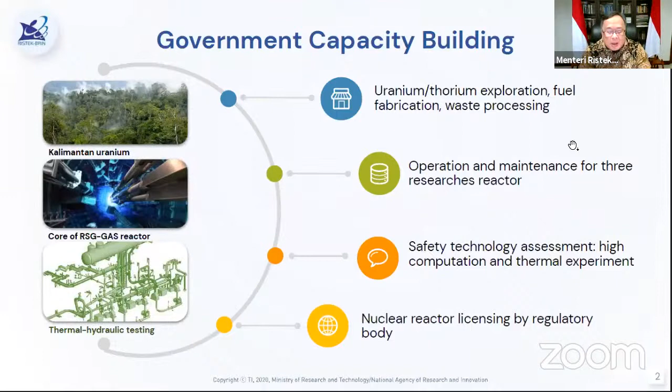Moreover, the specific capacity building for human resources on research and engineering has established a conceptual design of small nuclear power plant, supported by IAEA and collaborated with some national state and private engineering companies. The design improves Indonesia's human resource hard skill through high computation of nuclear reactor and thermal hydraulic experiments, which simulates the accidents happening in our laboratories.

Indonesia, in a similar scheme of human capacity building, also considers the operation and maintenance of 3 research reactors for decades. Therefore, Indonesia has also established a national regulation and regulator, namely Indonesia Nuclear Energy Surveillance Agency, or BAPETEN, for implementation and license of nuclear power plant at land-based condition.

The national industry on the application of nuclear technology provides some radioisotopes produced by our nuclear facilities, including research reactors. Those productions are fulfilling the national market demand that's increasing year by year. The medical purpose gives the hospital capability to help people, especially for those undergoing cancer treatments. In other aspects, mineral mining also utilizes some techniques for logging and process sensing of chemical plants by using radioisotopes such as cobalt-60.

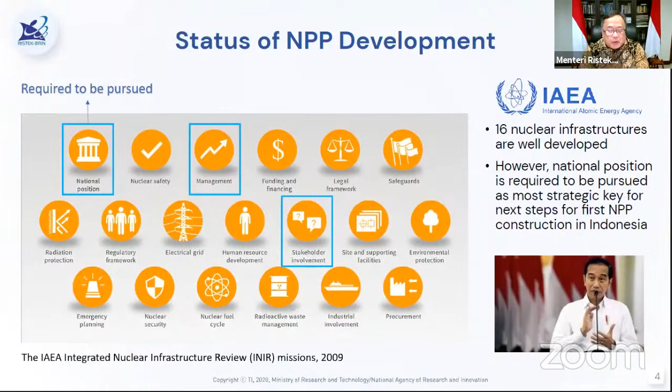To pursue those national positions, the consideration involves some assessments that include multi-criteria of the nuclear power plant's importance, national and international cooperation, regulation development, and continuity of the program between national stakeholders. All assessments are mostly done by following the presidential decree, which states that nuclear power plant must consider multi-criteria, assess the technical safety, and last option energy that could be interpreted since the demand could not be fulfilled by all other new and renewable energy resources.

Furthermore, the assessment will be a decision basis for national political support with the aim of the go nuclear option. In parallel, the national stakeholder prepares a roadmap for nuclear power plant implementation, which is led by the Ministry of Energy and Natural Resources, Technology and Site Selection, which is coordinated by the National Nuclear Energy Agency of Indonesia, or Batan, as well as licensing, which is conducted by Indonesia's nuclear regulatory body, Bapeten.

In our national context, our speakers are beneficial for us to have a clear understanding on how our nation prepares to have our first nuclear power plant. I really appreciate how Batan, in collaboration with other agencies, prepares our national capacity from site selection, nuclear fuel, nuclear reactor operation and safety, also nuclear waste technology, and all the required infrastructure in the frame of the National Nuclear Energy Program.

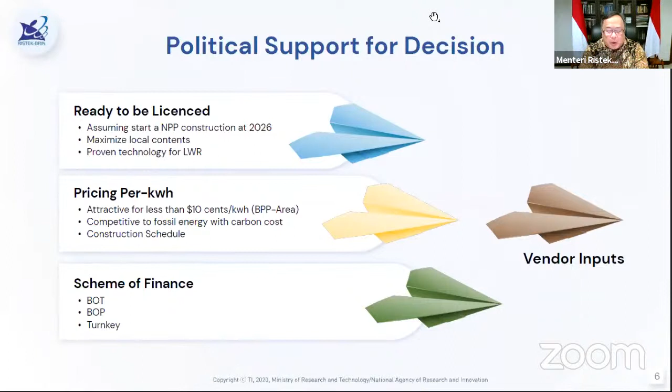So by saying Bismillahirrahmanirrahim, the international webinar on technology readiness and safety of small modular reactors is officially open. Thank you very much. Wassalamualaikum warahmatullahi wabarakatuh.

Thank you very much, His Excellency Professor Bambang Brodjonegoro. It's quite important that you support the nuclear program in Indonesia, and also that it's crucial for the presenters today to deliver their presentation and the data, the information, for us to be able to compile all this information to move further with this program.

So before we continue with the presentation from the IAEA and technology holders, let me inform you of the importance of key aspects that we want to hear from the speakers. We need to address the billion-dollar question from our government, from the ministry: which SMR technology is available for near-term deployment?

There's also a question on economics, cost and electricity price, and also the financing—what sort of financial scheme can be offered. This is also a very important question. And what will be the deployment scheme and the roles of our national stakeholders and industries. And most importantly, how safe is small modular reactor technology compared to existing operating nuclear reactors, and what has been done by the technology holders on their design based on the lessons learned from Fukushima.

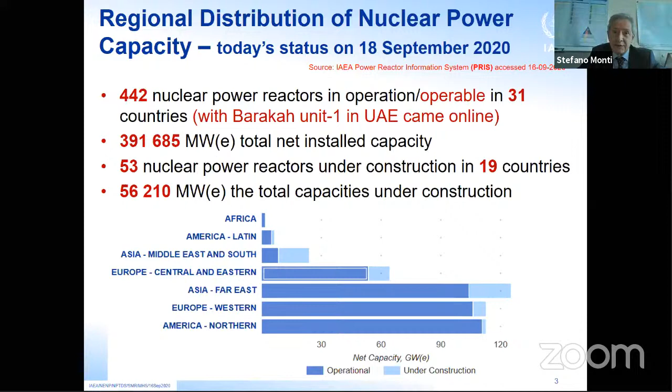The message is very clear that Far East Asia is slowly taking over in terms of nuclear power capacity. They are more or less already at the same level as Western Europe and North America, and it is supposed to overcome these two regions very soon, within this decade. So the trend is clear: Asia is becoming the main player as far as nuclear power programs and capacity.

Of possible interest is what is going on in the countries which are new in the nuclear sector, the so-called newcomer countries. As I said, there are 53 nuclear power reactors in 19 countries. Some of them are very experienced nuclear countries, like Russia, India, South Korea, and obviously China. But there are also some newcomer countries, which may represent, to some extent, a reference or example for you.

The Emirates connected their first APR1400 to the grid in August, and now they are very close to completion of the other 3 units. Then we have Belarus, another very advanced newcomer country, where they have already loaded fuel in one of their VVER-1200 units. And then we have Bangladesh and Turkey, which are more or less at the same level with each of their units.

So I said Bangladesh and Turkey each have 2 units of VVER-1200 under construction.

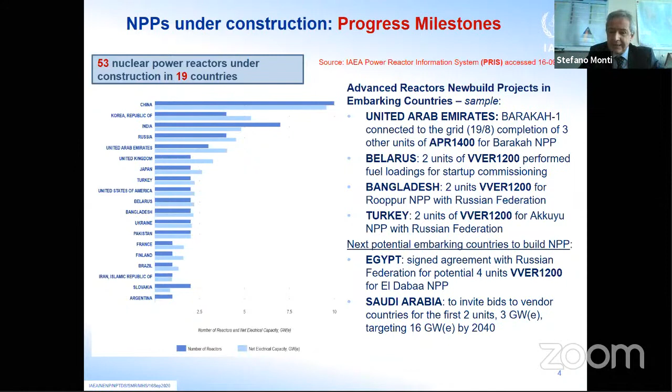And then there are others, I would say more than potential embarking countries, because they have already expressed a bigger commitment to building nuclear power plants. These are Egypt, with a big agreement with the Russian Federation for potentially 4 units of VVER-1200, and Saudi Arabia, which is in the process of launching bids to vendor countries for 2 units, with a very ambitious target of 16 gigawatts by 2040.

So when we talk about this current status, above all the new nuclear installations, what technology are we talking about? They are all large, so-called advanced PWRs and BWRs, which are already available in the market and can be ordered. Here are the 6 vendor countries with their offers in terms of large water reactors, with installed capacity ranging from 1 gigawatt to 1.5, and now even some 1.7 gigawatts.

So these are very big units, which of course require a big effort from the countries that want to adopt this technology. It's a matter of fact that in some regions of the world, the construction of these big nuclear power plants, which rely heavily on economy of scale, has in some cases posed problems in terms of longer construction times, due to several factors: the complexity of the design, problems related to the supply chain, and the fact that all of these new reactors in different parts of the globe were first-of-a-kind. We know it was the same for the Gen 2 reactors. Of course, when we talk about first-of-a-kind reactors, there are also unknown, unexpected problems.

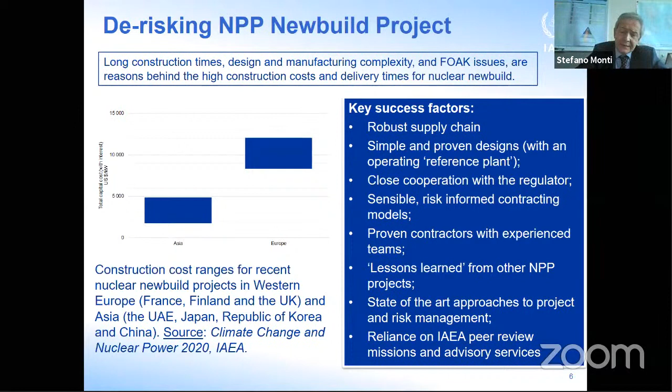newcomer countries and not very well-developed economies. So at a certain moment, the nuclear community posed the question of whether we have to consider some change in the game - at least try to offer another product.

This is not intended to replace the large advanced water-cooled reactor, but can open the door of nuclear power deployment to countries that are not in the position, for different reasons, to afford these large water reactors - both in terms of financial implications, or because they don't have a particularly developed grid, or because they represent remote regions of the world for which it's difficult to install several gigawatts electrical.

So this game changer is represented by the so-called small modular reactor, which the agency defines as an advanced reactor with a typical capacity of 300 megawatts electrical.

One of the game changers is the fact that they are supposed to be built in factories instead of on site, favoring the concept of modularization and also trying to speed up the construction time. When these modules are ready to be delivered by the factory, they are transported to the site and installed according to the demand.

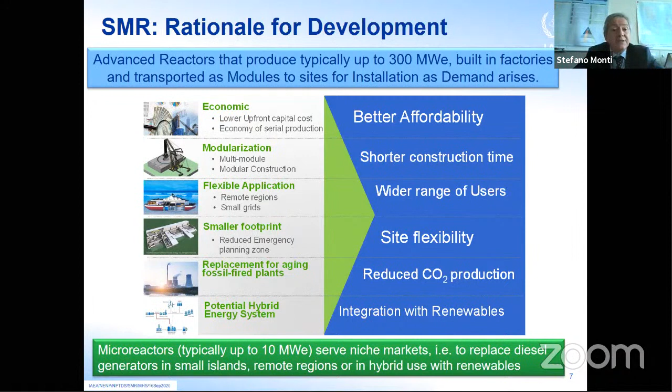The main concept of an integrated PWR, which seems to be now the technology of interest for Indonesia, is the fact that there is a possibility to make a very compact design by integrating all the main components—steam generators, pumps, pressurizer, in some cases even the control rod mechanism—into the reactor pressure vessel. In this way, the whole nuclear island becomes particularly compact. Of course, as usual, there are drawbacks, because if you put all the main components inside the reactor pressure vessel, it's clear that the RPV becomes bigger and also taller.

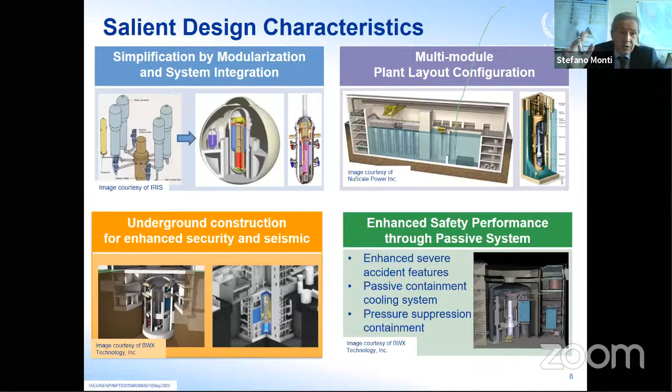If we consider the case of iPWR, we can see clearly, from the point of view of safety, clear advantages, but for each advantage there are also things that are not necessarily a problem, but require specific demonstration. Take the case of the wide use of passive safety systems—an advantage because it means they can operate without an external electrical supply. But since they rely on natural circulation, you have lower driving heads, so you have to demonstrate the system is reliable in any normal or abnormal situation.

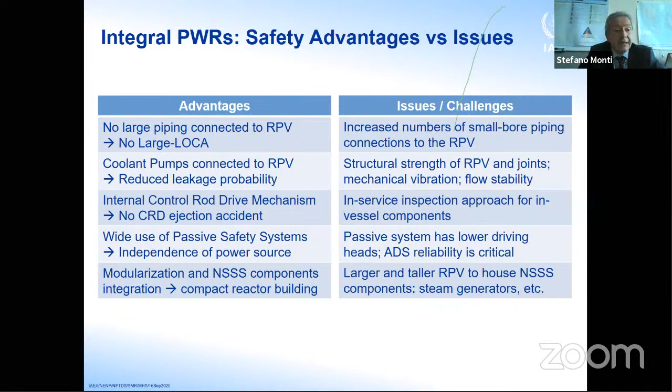Another point is that they are integral PWRs, so you eliminate all the large piping typical of a loop-based pressurized water reactor. In this way you should exclude by design the large LOCA. But there is an increased number of small piping connected to the RPV, and you have to assure that they don't break, and also what are the possible consequences of the so-called small break LOCA. There are clearly advantages from the safety viewpoint, but there are also some issues that sometimes require experimental validation through tests in order to support the safety case.

As I said, we also have two embarking countries which can somehow be considered technology holders because, for instance, they have signed joint ventures with other well-known vendors in order to develop and then deploy some SMR concepts.

Nowadays we have more than 70 SMR designs proposed around the world. Of course they are at very different stages of development. We range from one SMR already producing electricity and heat up to concepts which are really at a conceptual stage. So in terms of potential for deployment, the situation is very different, even for the different technologies. The range, when we talk about nuclear power plants, depending on the status of development, is very significant—between a few years and several decades. So to well understand the real status of development of a technology is really key for a country thinking about SMRs for near-term deployment.

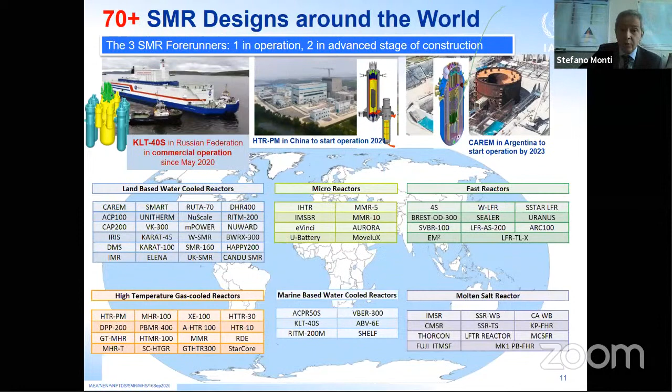And then we have, as I said, a very large variety of different technologies, from land-based water-cooled reactors to micro-reactors to even fast reactors, high-temperature gas-cooled reactors, marine-based water-cooled reactors like the KLT-40S, and also molten salt reactors. I think this is one of the most interesting slides for you.

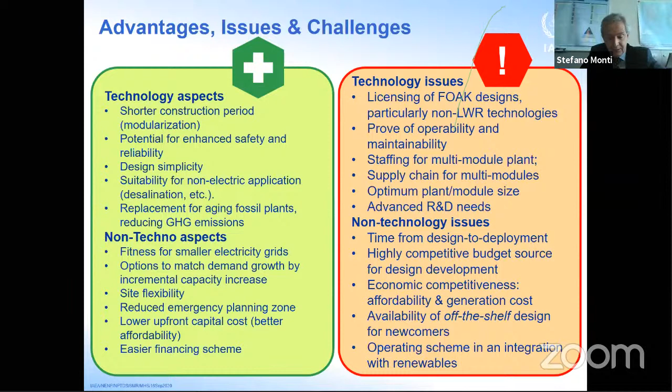This is an issue that the industry, of course, is called to address as soon as possible, according to the time to deployment. So the experience on operation and maintenance is also very important. When we talk about non-technology issues, we also have to demonstrate the economic competitiveness of these reactors, not only with respect to large water reactors, which can rely on economy of scale, but also with other energy sources, including fossil fuel, because the real transition to a clean energy system will be possible only if the nuclear energy sector demonstrates it can be competitive with respect to the current way to produce electricity and other energy forms.

Now, quickly going through what the IAEA can offer to member states in terms of activities and services. First of all, we are known worldwide because every two years we produce this booklet. We have just published the 2020 edition of Advances in Small Modular Reactor Technology Developments. This year the booklet is really comprehensive in terms of all the different SMR technologies being considered worldwide, as you can see in the full list. We have also introduced a chapter on microreactors and even on test reactors. And for the first time, we have included information regarding fuel cycle, decommissioning, and final disposal.

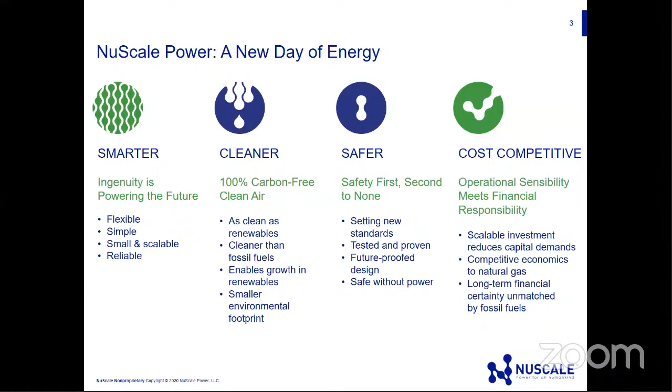For those of you not familiar with NuScale Power, let me share a bit about NuScale Power with you. The concept originated in 2000 with funding from the US Department of Energy via the MASLWR program, which is the Multi-Application Small Light Water Reactor program. Then in 2007, Dr. Jose Reyes formed NuScale Power for the sole purpose of completing the design and taking it to commercialization. Well, the program really did not take off until a couple of things happened.

One is Fluor, the global engineering and construction company, became our lead investor in 2011. Then in 2013, NuScale won a competitive US DOE funding opportunity. To date, this program has disbursed over $300 million towards this technology design.

Today, I am proud to announce that the NuScale design has completed its rigorous design review by the US Nuclear Regulatory Commission. We received the NRC's final design approval last month. We've got over $1 billion in investment in NuScale to date, and we are readying our technology for manufacturing and construction.

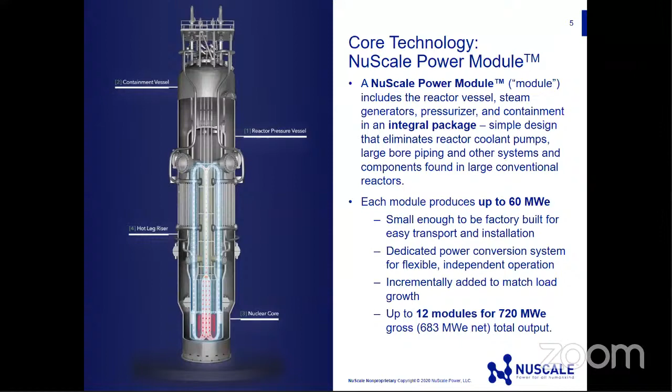As I mentioned, there are 12 modules in the NuScale power plant. Each of these modules is dedicated and connected to a dedicated power conversion system. This is a fully factory fabricated, skid mounted turbine generator, the condenser, and the feed and condensate equipment. Each module feeds one turbine generator, eliminating single shaft failure, which means if one turbine generator fails, the remaining 11 modules in the power plant will continue running and generating electricity.

Also of importance is that these modules can be incrementally added to match the growth or economic needs of the facility, and we can run from 1 up to 12 modules installed.

The NuScale power module design is simple, and therefore simplicity enhances safety. The design is based on natural convection for cooling, driven by gravity and natural circulation over the fuel. There are no pumps, no emergency generators. As you can see, the design is second to none on the safety case, and this enables a site boundary emergency planning zone for our technology.

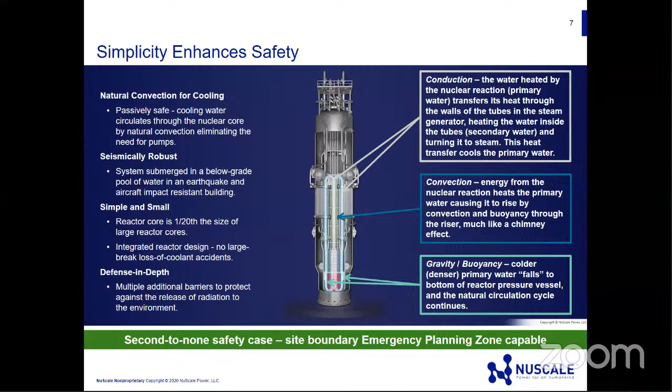So in terms of safety, we have what we define as the indefinite coping period. What does this mean? Let me explain with respect to the Fukushima event. So the earthquakes shut down the reactors, and they shut down automatically, which is what they were supposed to do.

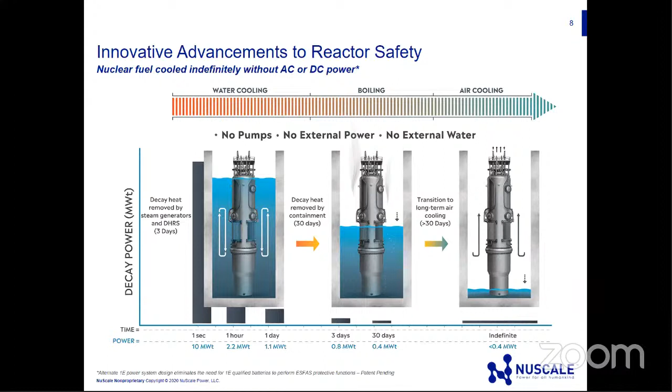The facilities then went on backup power provided by the diesel generators. But then came the tsunami, and it caused the diesel generators to shut down. So when the stations had lost all power, they had a certain amount of coping time, in this case 72 hours, to do something. They had to either start the pumps, open the valves, or add more water into the reactor to keep the reactor cores cool. When this failed to happen, the reactor cores overheated.

Well, in our design, all our modules are sitting in a pool of water. It's 7 million gallons of water that they're sitting in. And so on the loss of power, our modules would automatically shut down and self-cool for an indefinite period without the need to add any water, no need to start the pumps, no need for external power.

So the modules sit in the pool of water and they reject decay heat that is generated into the pool of water. Over 30 days, the water boils off, and as you can see in this graph, the amount of residual heat left after 30 days is enough that natural air circulation can remove the residual heat.

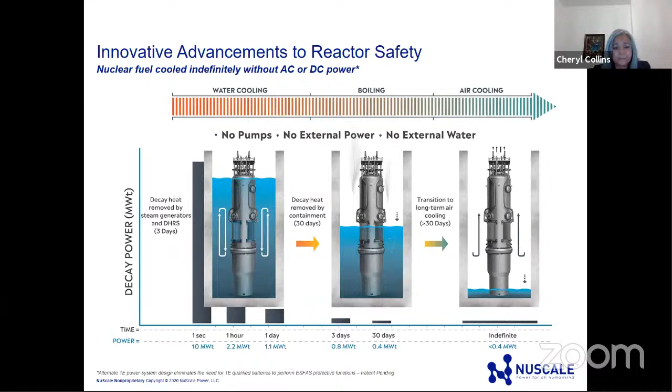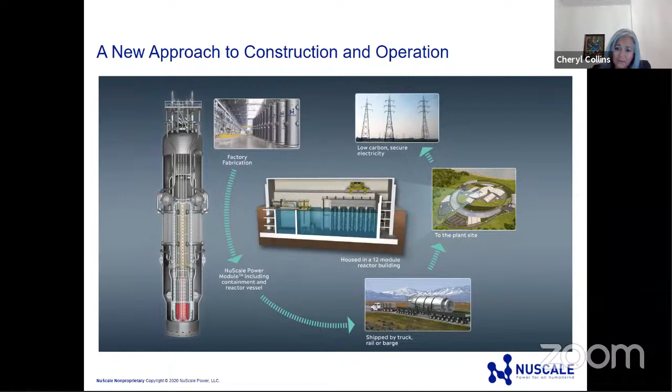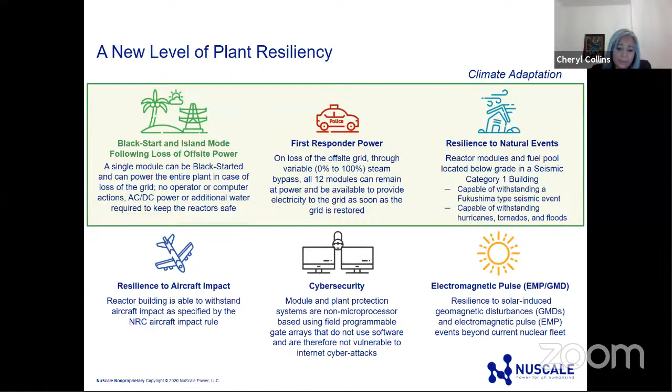We've covered the technology and the safety aspects of the NuScale SMR. I'd like to move on to discussing the progress in licensing, supply chain, and our customers.

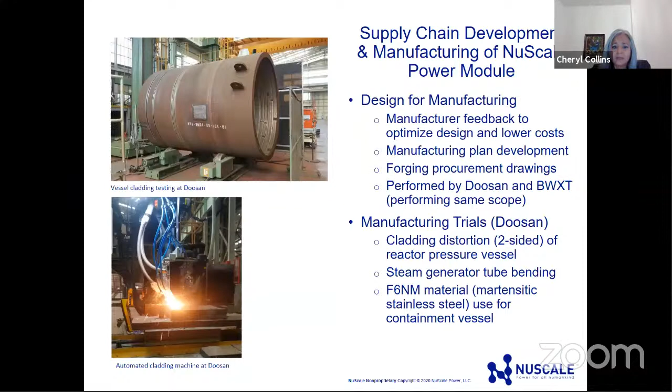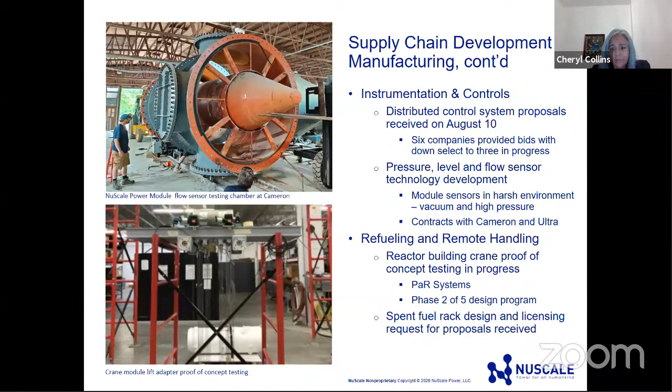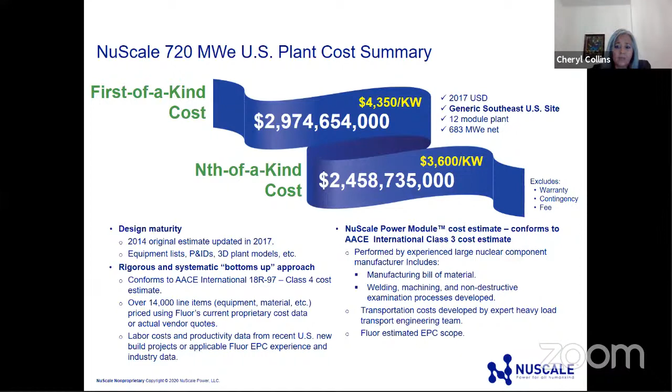A near-term focus is trying to get our first plant deployed in the United States, and we continue to engage several customers, especially in states that have legislation passed for greenhouse gas emissions reductions. On a global perspective, we have a lot of customer interest in our technology, especially as it nears commercialization. Foreign governments and utilities see NuScale as a viable near-term solution for meeting their energy needs, especially clean water needs, and meeting their carbon emission goals.

We've signed agreements in Canada, Romania, the Czech Republic, and several other countries. In Canada, we've actually submitted phase 1 and phase 2 of our pre-licensing vendor design review to the Canadian Nuclear Safety Commission.

I firmly believe that SMRs are the future of energy. After over a decade of research and development, testing, licensing, and engineering, the NuScale SMR is closer to commercialization. We're delighted to embark on this journey with our first customer, UAMPS, and with program partners like Doosan. We're confident that our first project will be the catalyst of many more projects to come in the United States and throughout the world, and certainly in Indonesia.

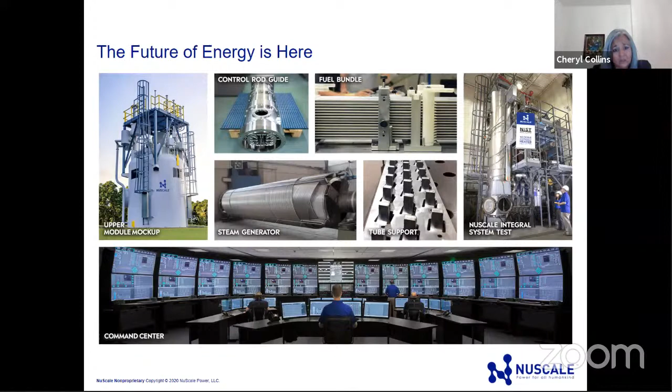Okay, thank you so much for the presentation. You covered the safety aspect, the design, the technology readiness, and also the cost and the cooperation that you're working on with others.

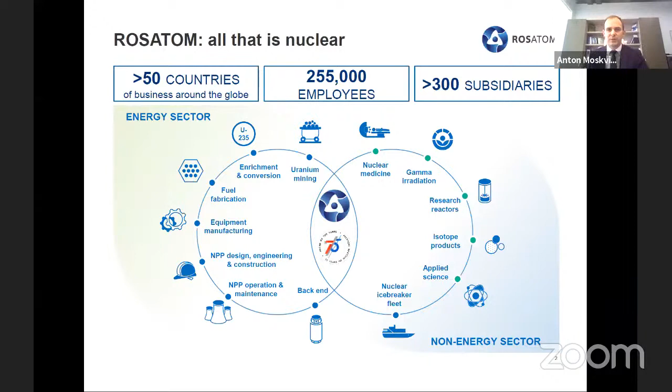We do believe that the advantages of small modular reactors are very important nowadays. They have their unique benefits to gain a considerable share of the new nuclear power plant market. Since 1954, we have designed and manufactured over 20 small reactors, both for civil and marine applications. We have accumulated vast experience in operating small reactors for the icebreaker fleet, over 400 reactor years in all.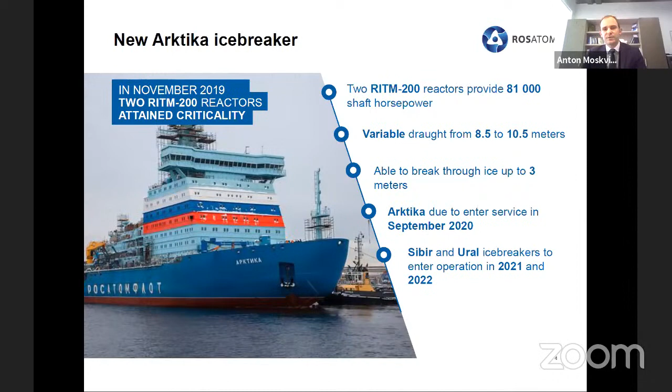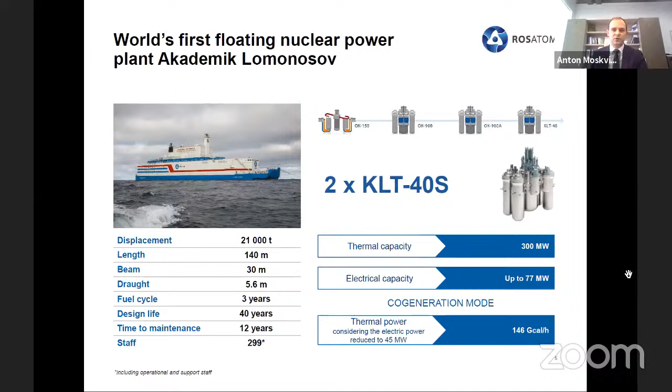Based on this vast experience, we developed the world's first floating nuclear power plant, Akademik Lomonosov. Mr. Monti described that in his presentation. It has an electric capacity of 77 megawatts, enough for a large industrial facility or a small city with a population of more than 50,000 people. It produces heat along with electricity as the climate of the region is very cold. In September 2019, the unit transportation was successfully carried out - we covered almost 5,000 kilometers within 17 days to its destination. In May 2020, it was commissioned and is currently operating safely.

With all these historical facts, now let me introduce our next big step: our most modern design of a small modular reactor, the Ritm-200, an evolutionary technology development based on its predecessors, incorporating all our experience of SMR design, construction, and operation. It is time-proven PWR technology with an integral design with the steam generators located inside the reactor vessel. It is referenced in manufacturing - not only pictures and drawings - six of them have already been manufactured and installed on icebreakers.

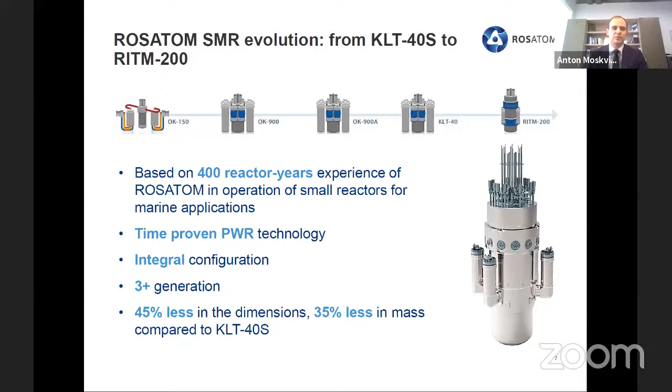The Ritm-200 features integral design. One important aspect of our integral design is that it almost eliminates the classic large loss-of-coolant accident and makes the reactor very compact. It has 4 steam generators, with steam temperature averaging 295 degrees Celsius at 3.82 megapascals and a capacity of 261 tons per hour. We use 4 main circulation pumps, because we performed numerous studies and concluded that forced circulation leads to more stable performance.

All key components of the reactors are referenced. Major equipment is similar to that used at KLT-40S, our current floating nuclear power plant, so we can say this is a tested innovation. The height of the core is 1.6 meters. We use 199 fuel assemblies, 12 control rods, and 6 safety rods. The fuel is low enriched, and the reactor is quite maneuverable - the power change rate is 0.1% per second.

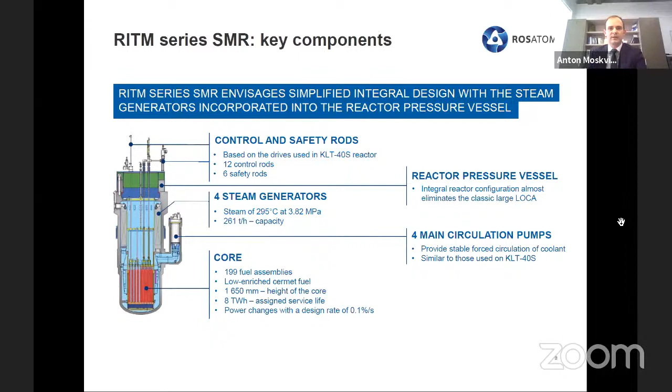Now let's talk about safety. Rosatom SMRs ensure nuclear and radiation safety and guarantee resistance against different external events. It is done in full compliance with the strictest regulatory rules and post-Fukushima requirements. Safety is enhanced by a combination of redundant and separated sets of active and passive systems, inherent safety features, and the defense in depth principle.

There are three functions that any reactor of our design has to perform to ensure its safety. We need to cool the core - active and passive safety systems excellently perform this. We need to control reactivity - to do that we have 6 groups of safety rods for fast shutdown in less than a second, and 12 groups of control rods to maintain the reactor in shutdown state.

We need to localize the radioactive material in case of accident development, and our in-vessel retention system provides for that. In case of an unlikely accident, for example total station blackout or LOCA, the reactor will stay safe for an unlimited time till the core is cooled enough. And in an even more unlikely case, for example two emergencies happening together, LOCA plus total station blackout, my colleagues from the engineering team have provided a 72 hour grace period, which is definitely enough for safety strategy implementation.

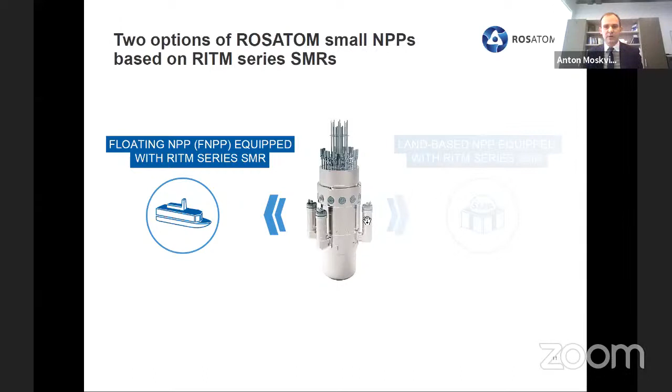There are two small NPP options available, floating and land-based. They are both based on RITM-200 series SMRs, and I will give you more details about the floating NPP first shortly. The floating NPP combines the traditional advantages of nuclear power with its unique benefits such as a short period of construction works on site.

We have a long fuel campaign - it's absolutely unique on the market, up to 10 years. There's no decommissioning on the site; we will take the plant back to Russia.

Flexible lifetime period - the floating nuclear power plants are built from start to finish in shipyards, and we presume mass production of FNPPs and therefore more efficient construction. In addition to cost savings, the FNPPs are very flexible and can be transported to another site.

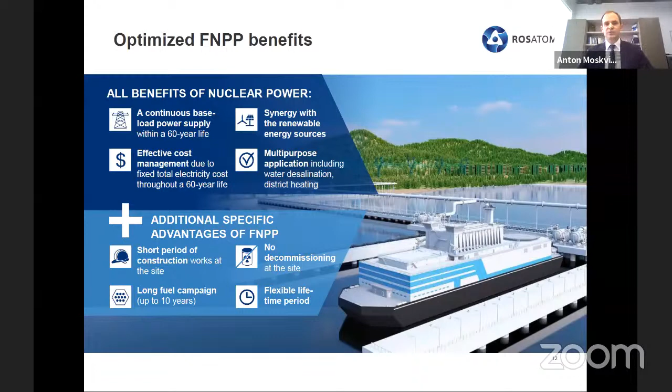Compared to Akademik Lomonosov, the new FNPP is more compact, more powerful, and more efficient. The electrical capacity is 100 megawatts. We increased the fuel cycle to 10 years and the design life to 60. We have already completed the concept design of the FNPP and plan to move to the technical design stage by the end of this year.

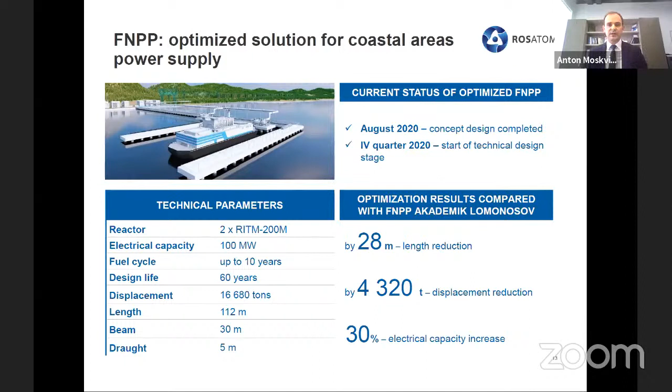Now a few words about the land-based energy solution. We have developed the concept design of our land-based SMR. It is equipped with 2 RITM-200N reactors with an overall installed capacity of 106 megawatts. It has a design lifetime of 60 years and the refueling cycle is also quite exclusive, up to 6 years. The capacity factor exceeds 90%.

Speaking about construction time, we expect it to be around 4 years for first of a kind, and we plan to decrease it to 3 years for next of a kind.

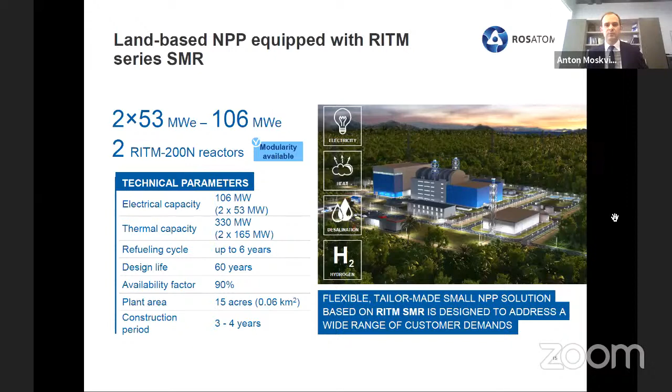Rosatom SMR allows a high degree of flexibility to direct the heat output for either electricity production or district heating. It can be deployed near residential areas or industrial facilities due to the emergency planning zone being limited to the territory of the NPP. The design is modular, which makes Rosatom SMR a suitable solution for local energy needs.

Modular construction allows increasing power generation by steps of 106 megawatts, and the auxiliary buildings area stays in shared use for all new nuclear units.

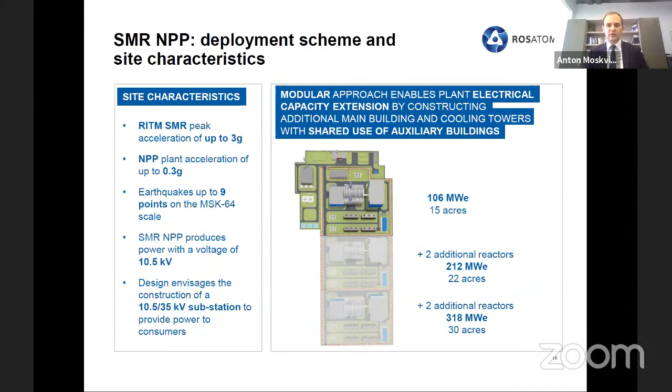Speaking about site characteristics, it's important to point out that our SMR is well protected against earthquakes. The design of the station allows it to withstand peak acceleration of up to 0.3 G. However, the reactor itself is able to withstand up to 3 G acceleration.

Now let me share with you our approach to price estimation. We design our SMRs taking into account the target commercial parameters that should ensure their competitiveness compared with conventional generation sources like coal or gas. On the other hand, the particular cost of an SMR varies greatly depending on the financial aspects of the specific project.

First of all, I'm speaking about the cost of financing, which greatly depends on the model of project implementation and the local economic situation of the project implementing country. The large effect of the discount rate is clearly visible on the slide.

The particular costs of the SMR and NPP project cannot be determined precisely and may vary depending on site parameters, regulatory requirements, construction conditions, nuclear power plant configuration, and some others. This is just like for the large nuclear power plants.

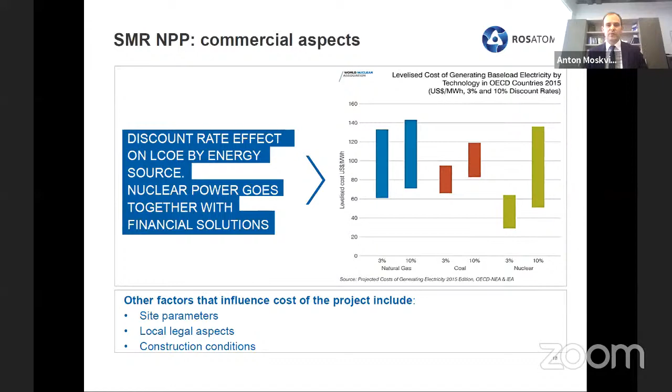We in Rosatom follow the policy to offer only a reference solution to our potential customers. Here I would like to quote Director General of Rosatom, Mr. Likhachev. He said that an important aspect of our foreign practices is that Rosatom always follows the principle: firstly, we build in our own country, and only then offer technology to the foreign markets. So we are now focused on our first-of-a-kind project in Russia.

Rosatom is considering several sites for the first land-based small modular reactor in Russia. We do not have a design certificate stage in Russia, so we are getting prepared to get the site license by 2023, the license for construction by 2024, and we are planning to start construction the same year. The major target year is 2027, when we plan to commission the SMR.

Through all our international projects, we guarantee the widest involvement of local engineering and construction companies. Local vendors have chances to provide general construction and installation services, and supply machinery and materials that do not affect the overall safety of the nuclear plant. If the local industry is advanced, then local input will be definitely higher.

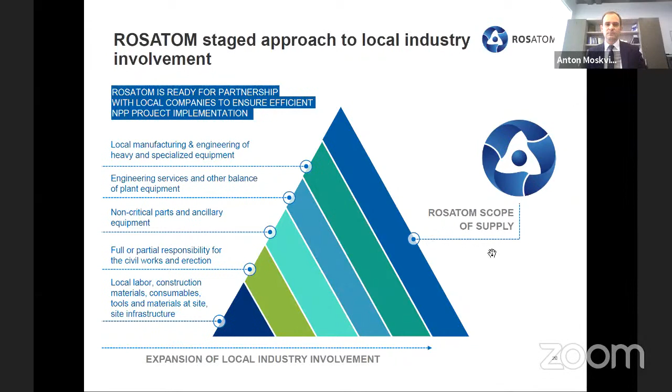Summarizing what's been said, let me reiterate some main takeaways. First, we have strong experience in design, construction, and even operation of small modular reactors. Our latest projects are the floating nuclear power plant Akademik Lomonosov, commissioned in May this year, and 6th generation 3+ RITM-200 reactors manufactured and installed on icebreakers. What's important about our market proposal is that we always test and try the nuclear power plants in Russia before offering them to our international customers.

In the case of the RITM-200s, they will be tested in the most severe technical and environmental conditions of the icebreakers. RITM series SMRs feature a time-proven PWR technology with an exclusive fuel cycle of up to 10 years and accident-tolerant fuel. RITM series SMR is safe.

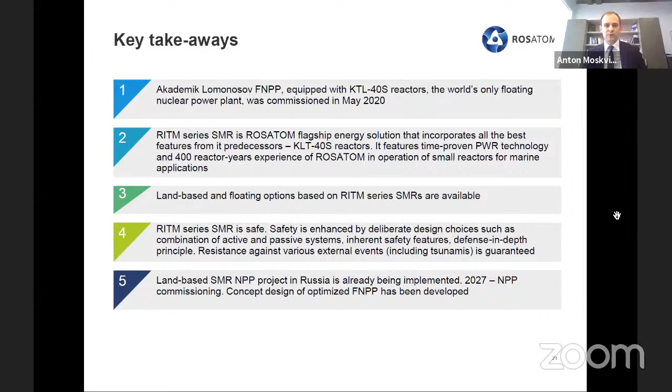Safety is enhanced by a combination of active and passive systems. The land-based SMR and NPP project in Russia is already being implemented, and in 2027 the nuclear power plant is going to be commissioned.

To conclude, let me reaffirm that Indonesia is one of the most important and interesting partners for Rosatom. We are ready to provide all the required support to the development of your national nuclear program. We are sure that both large-scale NPPs and small modular reactors may find their place in your energy system and strengthen the country's economy, education, science, and high-tech industries. We are open to any kind of project implementation model, ready to invest into the capital of the nuclear power plants, and ready to share knowledge on project planning, construction, and operation. As I said in the beginning, Indonesia has all it takes to launch a strong nuclear program, and we are ready to assist.

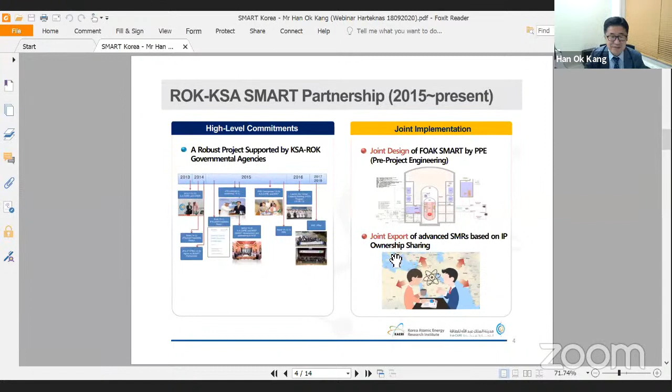Now I'm talking about pre-project engineering. This project is the first phase for the SMART partnership cooperation between Korea and Saudi Arabia. The project period was December 2015 to November 2018. The purpose of this project is to detail site-specific engineering work for the SMART construction in Saudi Arabia. The work scope includes reactor system, fuel design, balance of power plant, and main component design and validation. Based on this design work, we produced a preliminary safety analysis report for licensing.

Major industries of Korea, including KEPCO E&C, KEPCO NF, and also Doosan Heavy Industry, participated in our project for their expertise. KAERI also operated the Human Capacity Building program for knowledge transfer, which consisted of CRT Basic, CRT Technical, and OJT and OJP. Actually, 48 Saudi engineers stayed at KAERI and participated in the detailed design work as independent authors.

This figure shows our SMART integral reactor. As mentioned, in the integral concept major components like the core, steam generator, and pressurizer are located inside the reactor vessel to remove large break LOCA. There is no large penetration through the reactor vessel. All small penetrations are less than 2 inches and are located above the top of the steam generator. This is a very good feature from the viewpoint of LOCA scenarios. The reactor coolant pumps are canned motor pumps and are horizontally mounted above the steam generator. Helical steam generators are once-through type and produce superheated steam without a moisture separator.

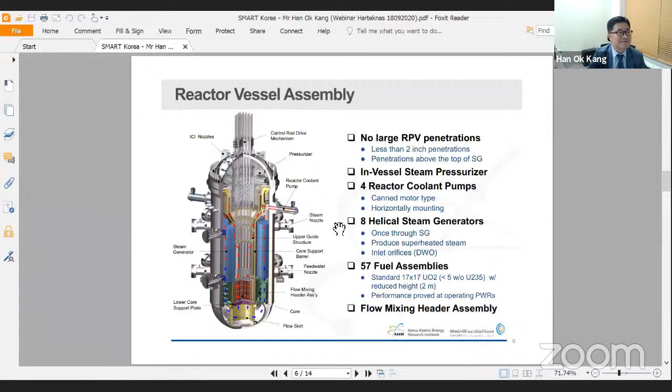All the safety systems of SMART operate such that operator action or electric power is not necessary for the safety function during a design-basis accident. The typical safety systems of SMART include the passive safety injection system, passive residual heat removal system, and containment pressure and radioactivity suppression system. All these systems operate based on natural forces like gravity, pressure difference, and water-pool radioactivity suppression. Therefore, the safety system can operate without depending on electric power from an emergency diesel generator. A safety-grade battery provides necessary DC power for valve initiation and post-accident monitoring. So basically, related to the Fukushima accident, SMART can maintain safe conditions even under station blackout conditions without support of electricity.

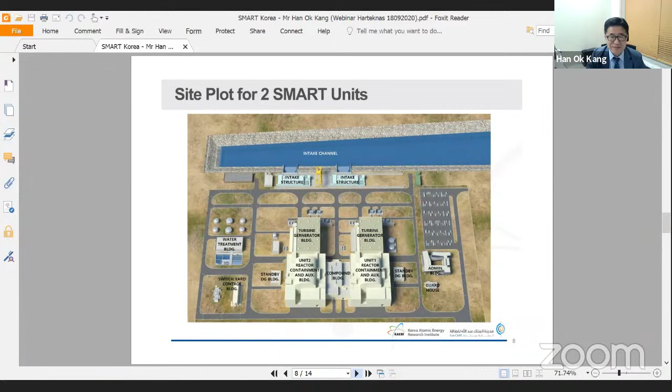Throughout the SMART development, comprehensive design validation and verification programs are completed. A series of tests and experiments are carried out to examine physical phenomena related to the specific SMART design concept.

Two kinds of integral test loops are used to investigate thermohydraulic performance of SMART and simulate various transient conditions. A small-scale facility, VISTA ITL, and a large-scale facility, SMART ITL, are built inside the KAERI boundary. If you visit KAERI, you can see these two facilities. SMART ITL has a real height scale of 1:1, and a volume scale of 1:49. It's a very big, huge facility to examine the hydraulic features of SMART.

These facilities are used to understand the thermohydraulic behavior during operational transients and design basis accidents, and to simulate LOCA scenarios. These tests are performed for verification of our safety analysis code, which we call TASS. TASS is the specific in-house code for accident analysis. In addition, natural circulation tests for the primary coolant system and passive residual heat removal system are also performed using this facility.

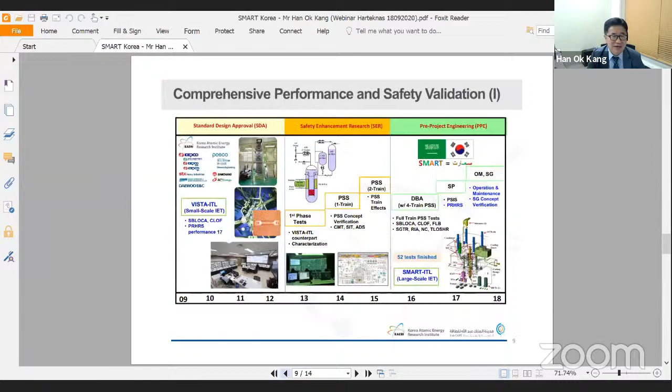Okay, thank you. I appreciate it. Okay, okay, yeah, I'll go to this page. One or two minutes more, thank you. Thank you, thank you. Here, next. Okay, you next please, and next please.

During the SMART pre-project engineering, there was a design change, including power uprating and a fully passive safety system, for better economics and safety. So KAERI, K.A.CARE and KHNP applied for a new standard design approval for our current design. This SDA project entered the regular technical review phase after compliance review of docketing. We expect that the final safety evaluation report will be issued by the end of next year.

Next, please. Next, please.

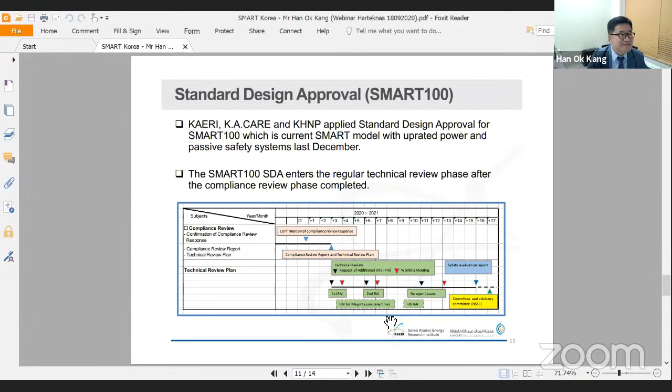Now I'm talking about the business model. Korea and the Saudi Arabian side, K.A.CARE, are joint owners of SMART technology. Recently, Korean KHNP began to play a role as EPC for global SMART commercialization. So the SMART team now consists of KAERI, K.A.CARE, and KHNP. I think it is the best combination for SMART development, deployment, and global commercialization.

We applied this kind of approach to some new countries, like Jordan, the Philippines, and others. We found that SMART can be a very good optimum candidate for those countries, with a very competitive construction cost and levelized electricity cost.

Thank you everyone, good afternoon everyone, and good morning to some of you. Can you see me? Can you see my slides? Yes, sir. Okay, let's proceed.

We have a history of exchange with Indonesia, not only in nuclear, but also in generation, in renewables, in the grid, with smart meters. But of course, we also talked about SMRs lately. In 2018, there was an RFI launched by the Ministry of Research, Technology and Higher Education. We replied to this RFI, and one chapter of our reply is specifically on SMR technology in development at the time of the consultation.

If you want more details, you can find a lot of them in this response, which is covered by an NDA.

We also organized a Franco-Indonesian seminar in June 2019, last year. This seminar took place in West Kalimantan, near the site of a potential SMR. We exchanged on the technology, of course, but also on the development of the needed nuclear infrastructure, because SMRs are quite similar to large reactors in this regard. You still need to have a nuclear infrastructure.

And it was mentioned by your minister, you had an INIR mission, I think, in 2009. This is an important point to note. Luckily, Indonesia is knowledgeable about nuclear, but we are ready to provide our assistance, not only in technology, but also in infrastructure development. Since then, our technology, French nuclear technology, is now branded NUWARD. I will come back to that in a few minutes.

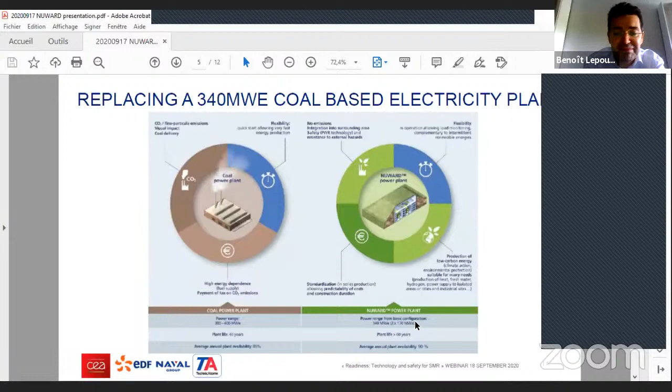NUWARD is a semi-buried design, which has two advantages. One is for acceptability, and it needs to be also noted that the EPZ is limited to the site boundary, which is also a strong point in public acceptance, but also it makes the design quite resistant to external hazards.

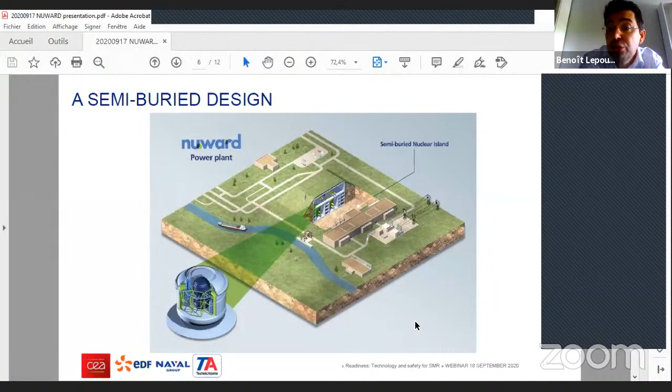So if we want to dig a little deeper into how the reactor is designed, we have the pressure vessel, which is integrated with hydraulics and upper internals. This pressure vessel is then inside a steel containment, on the right, where we produce electricity from the steam, which comes out of the pressure vessel.

And we are now in the process of optimizing the nuclear island layout for a 2-reactor configuration. We are optimizing this layout in order to make it, once again, competitive against traditional power plants.

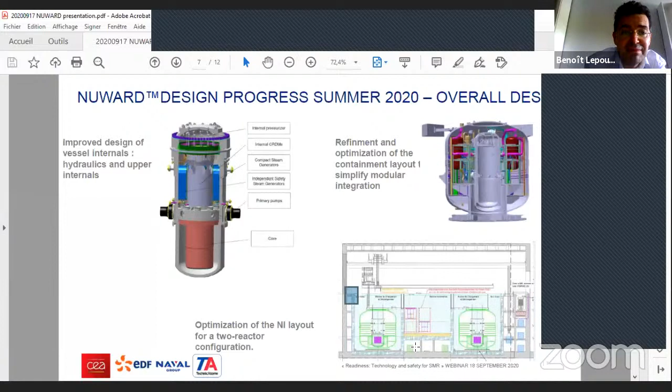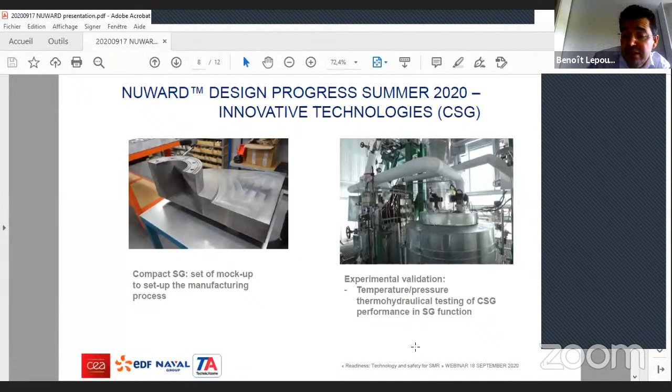So if we want to talk about the progress this summer, we have a set of mock-ups for the manufacturing process of our compact steam generator. We have also experimentally validated the temperature and pressure of our compact steam generator in its function. We have hermetic technologies for the control rod drive mechanism, which is also integrated as was shown before. And we have also tested the in-vessel wiring under high temperature and high pressure.

This is where we stand right now. So we started in 2012 with a feasibility study. We then had a pre-conceptual design until last year. We are right now in the conceptual design phase, with the aim to enter basic design in 2022 and have detailed design and licensing from 2025.

The aim is to have NUWARD available as a commercial solution by 2030, which means that we'll probably have to have a first unit constructed either in Europe or North America.

NUWARD is open to international cooperation. It was announced and branded as NUWARD during the General Conference of the IAEA in September 2019. It is, in fact, the collaboration of several companies, with EDF leading the development, with help from CEA, Naval Group, and TechnicAtome, who have long experience regarding marine reactors. But on the same day, we also signed a framework agreement with Westinghouse, well known in PWR technologies, to explore potential cooperation on SMR development, which means joining NUWARD. So we are definitely open to international cooperation.

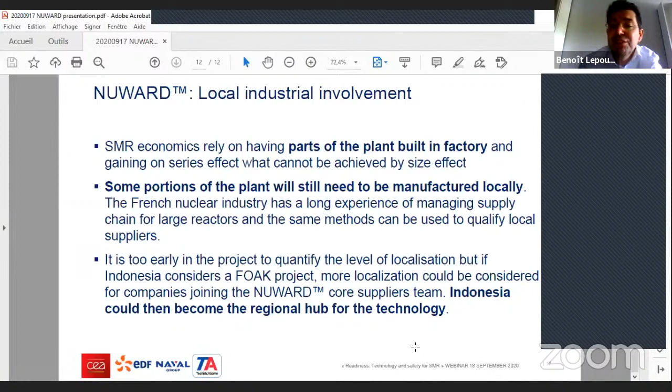Thank you. So we have heard about the technology readiness of your reactor technology, and by 2030 it could be ready for deployment. Correct. And also thank you for pointing out the localization, the local content that can be given to embarking countries like Indonesia.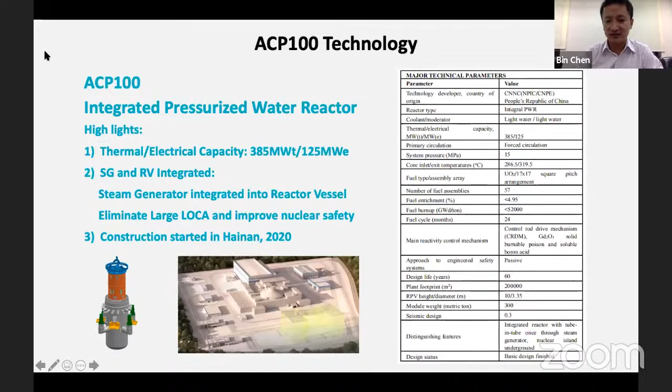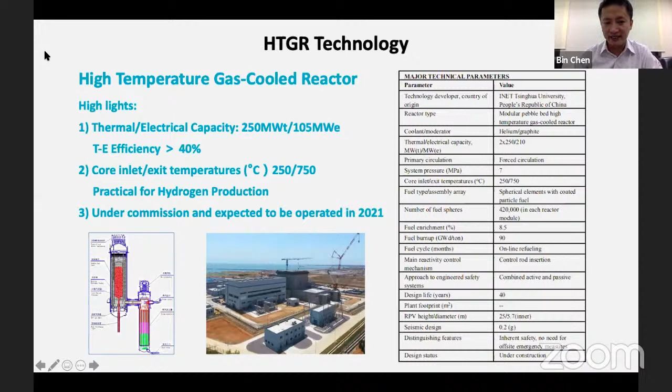Another one is what we normally call the high temperature gas-cooled reactor, with an electrical capacity of 105 megawatts. The efficiency of the turbine is much higher compared to the PWR because the exit temperature is much higher, reaching as high as 750 degrees centigrade, giving great practical feasibility for hydrogen production in the future. This demonstration project is already under commissioning and expected to be operated next year.

As the topic of our webinar today, I'm going to give you a detailed introduction: first, the safety of SMR by its design, then the progress of our demonstration projects, and finally jump to the summary as the last part.

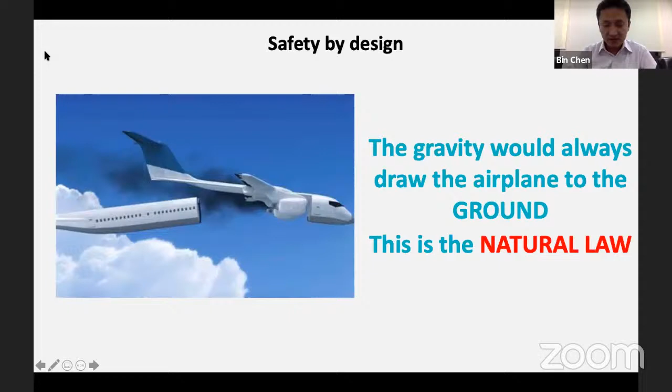The safety, what we call safety by design. Taking an airplane as one example, gravity would always draw the airplane to the ground, so the design should follow the natural law. For example, as passive safety by design, we have water tanks on top of the nuclear power station, and gravity-driven water injection will keep the core flooded. By the design of these passive systems, the residual heat will be removed and the core will stay safely cooled.

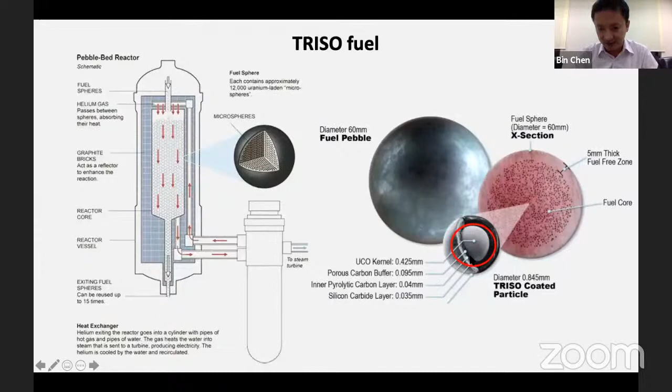But for the high temperature gas-cooled reactors, the safety is guaranteed not by the system, but by the characteristics of the fuel. This is what we call the TRISO fuel, a ball whose outer part is made from nuclear grade carbon. But the most important part, which guarantees the safety, is what we call the silicon carbide layer. This layer is so strong that radioactive materials are unable to penetrate it, and this is the unique material characteristic of it.

I can see some participants today asking questions about accident tolerant fuels. I'd like to emphasize that one candidate material for ATF fuel is also silicon carbide, and this material is already used for the high temperature gas-cooled reactor. Because this fuel is so small, that makes it so strong.

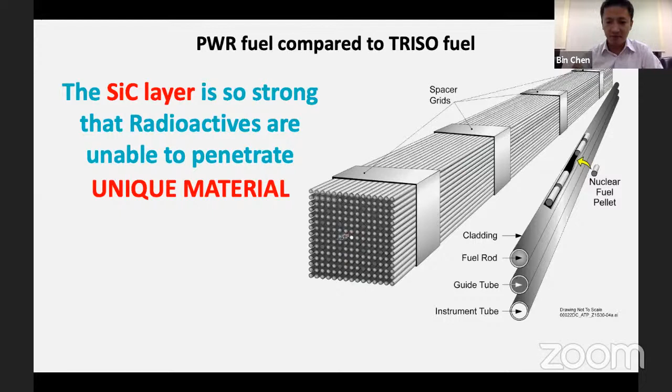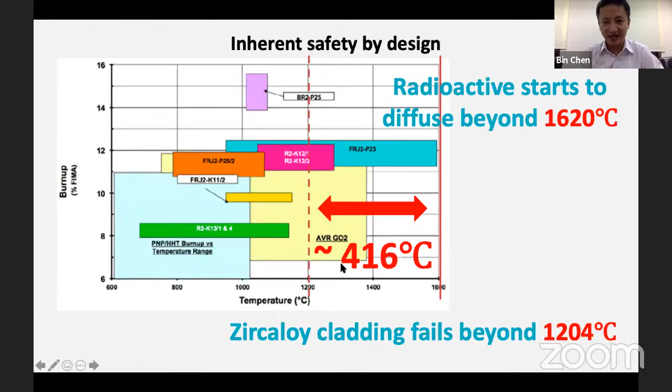Another point I'd like to emphasize is that for silicon carbide, based on all operating experience, the radioactive material contained within these tiny balls only starts to diffuse - meaning start to have tiny leakage - above 1,620 degrees centigrade. Comparing that with the normal fuel cladding material, what we call the zirconium alloy used in the PWR, which fails beyond 1,204 degrees centigrade, there is a gap of almost 400 degrees centigrade. This is where the safety margin relies, and by this inherent safety characteristic of the fuel material, the reactor is so safe it could keep its safety without any safety systems.

This is a severe accident experiment performed on a real reactor. I'd like to emphasize again, it was not performed on an experimental facility, but on a real reactor, witnessed by IAEA - the very first experiment combining loss of cooling with station blackout and failure of reactor trip. Still, you can see, despite all these accidents being triggered, nothing happens here. Everybody is witnessing and laughing. So, totally safe, totally safe.

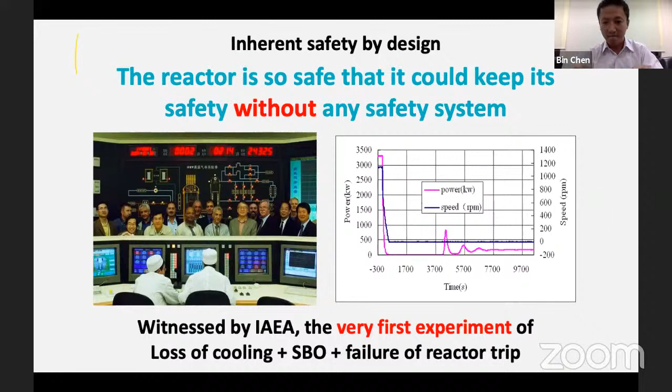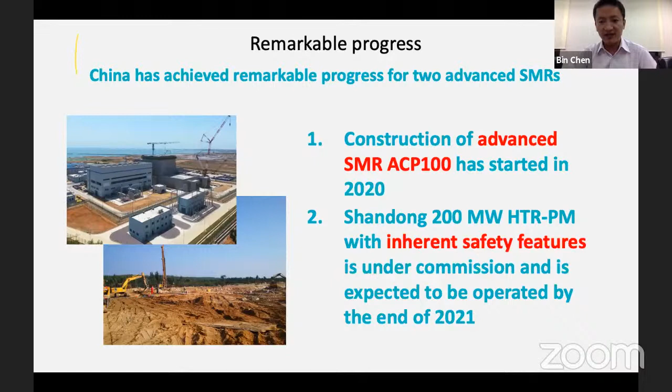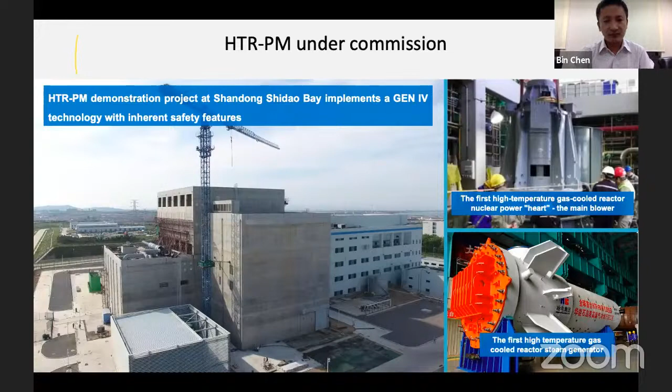Why is this so important, why has China devoted so much resources to the development of SMR? Because it plays a significant role not only in energy conservation but also in the reduction of carbon dioxide emissions, which is a promise of our government to the world, as well as in environmental protection.

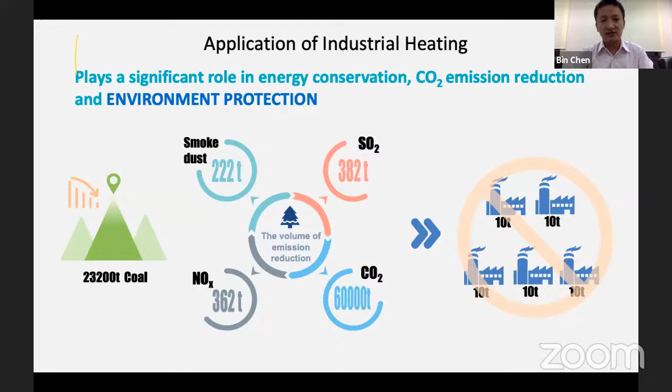The promotion of these advanced nuclear technologies is not only supported by the industry but also by our regulators. One of the most important aspects is the preparedness for emergency evacuation. There is an alternative regulation for SMRs, and our National Nuclear Safety Administration has issued guidance on emergency preparation for advanced SMRs, to further enhance the safety of SMRs while providing a more flexible way for the utilization of this technology.

China will continue to promote the comprehensive utilization of nuclear energy for greater contribution to global development, because nuclear power is the mightiest power source we have mastered so far for all human beings.

As also mentioned by other presenters, we believe the milestones from the IAEA recommendation are vital for development, especially for embarking countries. China, as well as our company, are more than happy to share our experience on the transfer of technology, the localization of manufacturing, sharing of experts, investment, and so on.

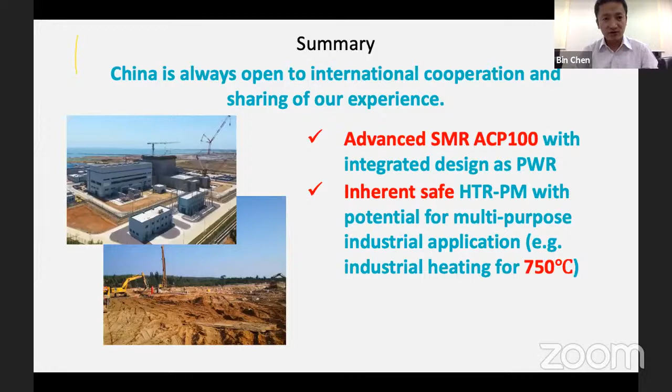In summary, I would like to again emphasize the SMR, which is an integrated design PWR, and the HTGR with its unique inherent safety feature and also potential for multi-purpose industrial application. We are always open to international cooperation and sharing of our experience. We also believe that even for demonstration projects as a research reactor, the high temperature gas-cooled reactor fits the unique role of multi-purpose application quite well.

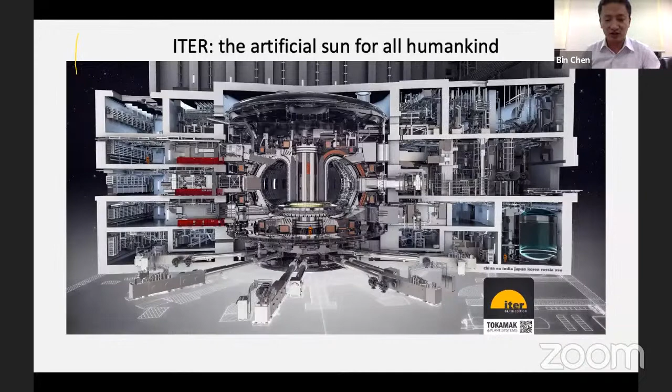One more thing I would like to mention today is ITER, the artificial sun for all mankind. This is an international project which has been under construction and commissioning for several decades. As for the forecast of the future, as the grandpa of my grandpa mentioned, we are only 50 years away. But as the era of my grandpa, it is still 50 years away.

However, last year there was an aggressive announcement that now we are only 40 years away from our own sun. Why? Because I believe that for the nuclear industry, after Fukushima and after COVID-19, we are facing a hard situation. But despite how hard nuclear is, our mission is to break it and absorb the energy for a better tomorrow.

Thank you for all your participation. That's the sharing of my presentation today.